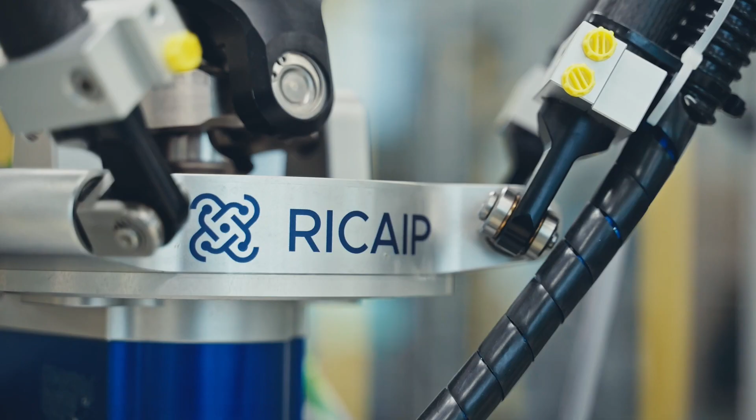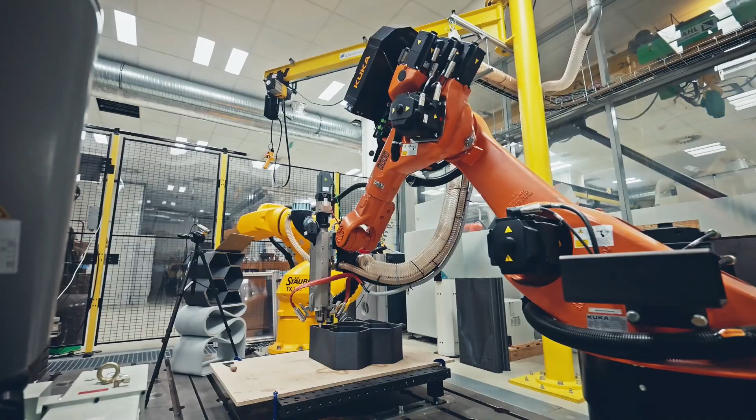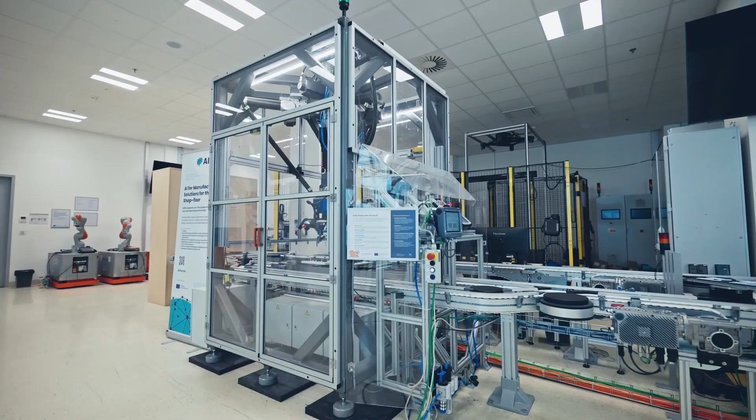Today's production must respond faster than ever to changing demands, shifting conditions, and unexpected disruptions. At RICAIP, we explore how manufacturing can truly adapt compared to traditional planning that still relies on a single, ideal scenario. In reality, however, capacities change and resources are not always available. Manufacturing as a service offers a different approach for more flexible and resilient production.

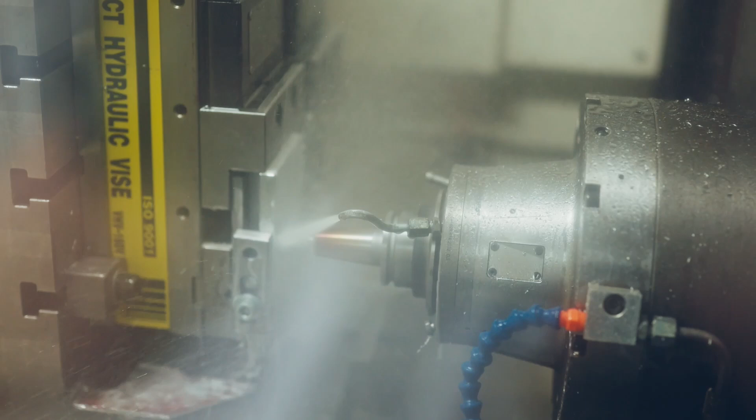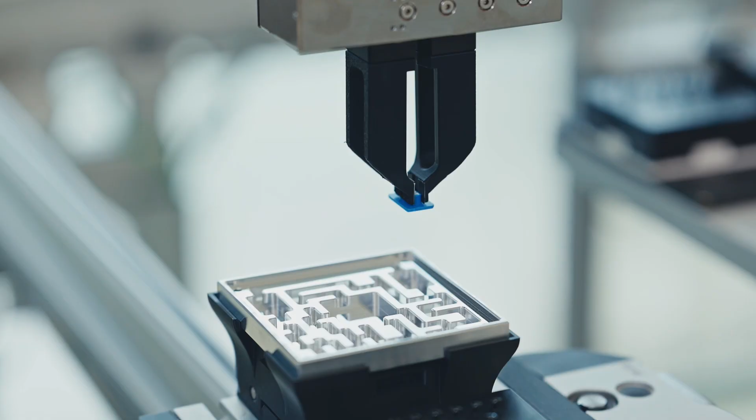The core of the production takes place in Prague. Advanced technologies such as 3D printing, machining, and automated assembly are used to manufacture and integrate key parts of the product. The execution of each operation is continuously coordinated by a central system. At the center of this process, there is a manufacturing execution system, or MES. It defines the workflow, assigns operations to available resources, and synchronizes all steps in real time.

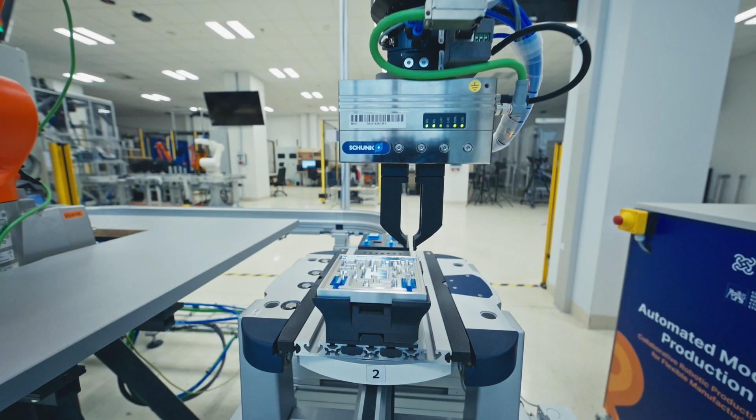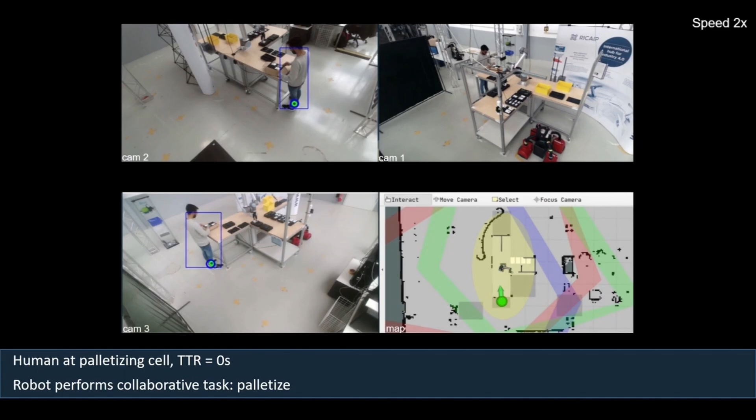By selecting a product variant, the entire production is configured and planned automatically using advanced methods such as graph neural networks. The test bed in Saarbrücken demonstrates a multi-agent system for production execution, showing that not only individual machines, but also complex systems can be integrated using standardized interfaces with defined semantics. The test bed in Brno is one of the production sites. It manufactures specific components and enables remote process inspection using an autonomous mobile robot.

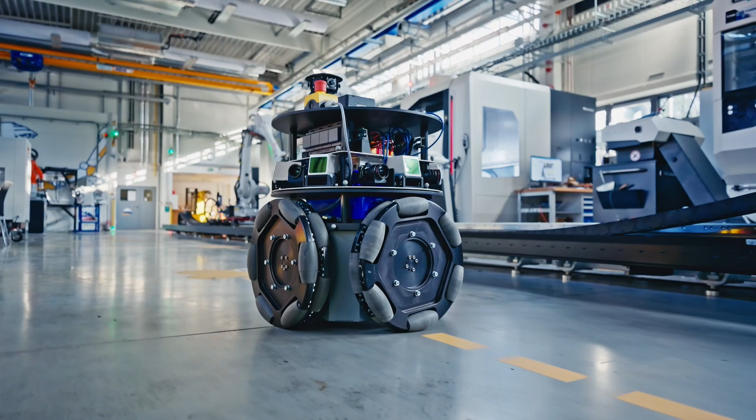All components are brought together, showing how manufacturing as a service operates as a unified system. This is enabled by standardized interfaces based on OPC UA and MQTT, real-time data exchange, and the integration of existing machines into one coordinated environment. Coordination is handled automatically using modern methods based on machine learning and AI.

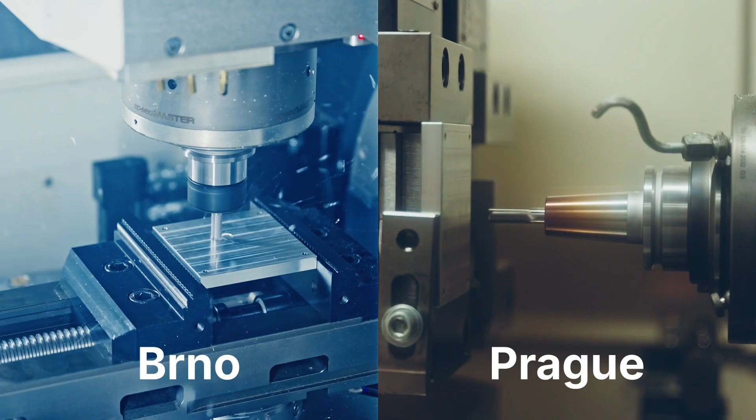What makes this system powerful is its flexibility. Operations are not fixed to specific machines or locations. They can be reassigned at any time based on capacity, availability, or changing requirements. If one resource becomes unavailable, the system can automatically find an alternative way to complete the task. For companies, this means greater flexibility and faster response to changing conditions across the entire value chain.

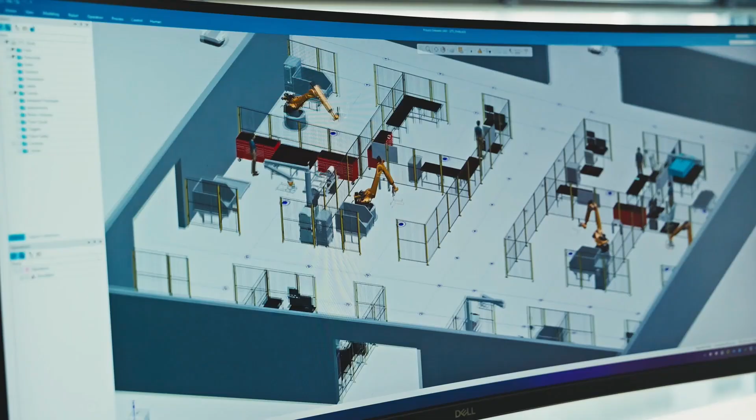The manufacturing as a service concept has been demonstrated with the T-Process platform and industrial MES deployed at many sites, making adoption in real environments straightforward. From coordinated operations to a finished product, RICAIP transforms manufacturing from fixed planning to an integrated, flexible production, ready to adapt to current challenges.

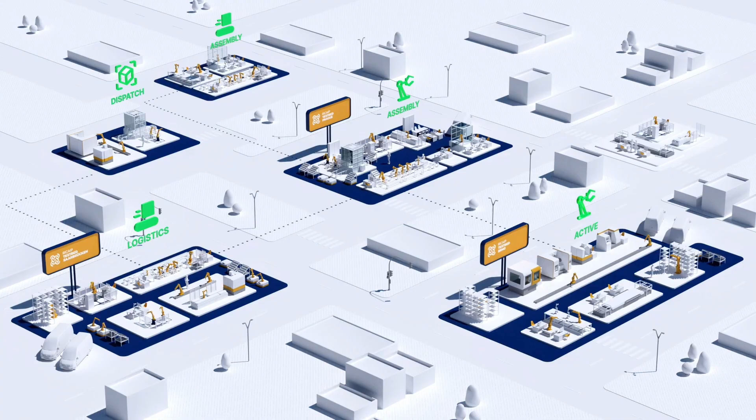So this was the introduction of the idea, and actually the idea that was at the beginning of RICAIP and that was, let's say, accompanying us for the whole duration of the project. Now I'm going to go a little bit more into the technical details that will show actually some pieces of equipment that are part of our testbeds, but also talk more about the concept of how machines are interconnected into bigger systems and then to individual sites.

The state-of-the-art production is mainly controlled intuitively, so there is no flexibility. Typically, there is no flexibility in how the production is organized and how the production is controlled. So when planning is performed by a manufacturing execution system or an ERP system, it's often based on infinite capacity assumptions, so that we do not expect any disruptions, any failed buffers, and so on. So no alternative work processes are available very often.

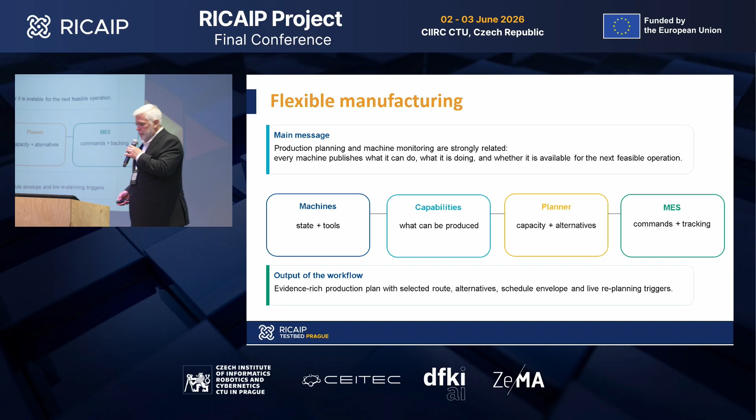So this is the idea and how we implemented it. These are the main blocks of the solution, which consist of machine data and representation of the resources or assets using asset administration shell, which is one of the key concepts of Industry 4.0 from its very beginning. And of course, we need a standardized interface to the machines to provide commands to them, but also to read the status and actual information about what is going on there.

Then we want to match and explain how this can fit together with the requirements of the products, what needs to be produced. So these are the capabilities, availabilities, matched to what is needed. Then dispatched to the manufacturing execution system to execute the commands, provide some operator view over the dashboard, and have the possibility to replan the production when conditions change.

I would like to emphasize a synergic project, RACEMAN, which focuses on manufacturing execution service, manufacturing as a service, and our participation is based to a very big extent on what RICAIP created.

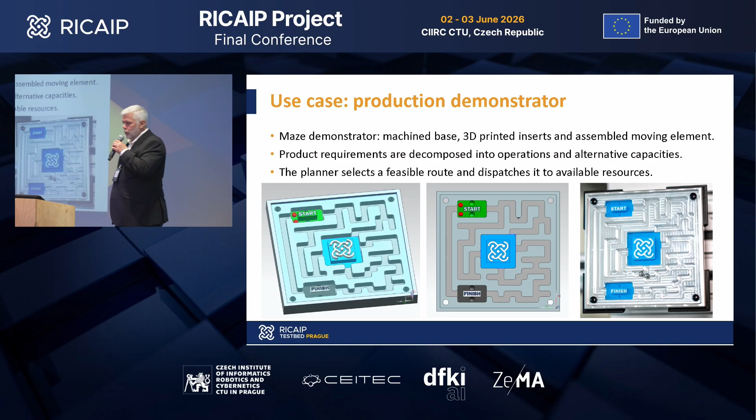So a simple maze, which consists of production operations as well as assembly operations, and these are the individual subparts with steps that need to be executed. In fact, this is the route for the product to be produced from individual subparts to the final product.

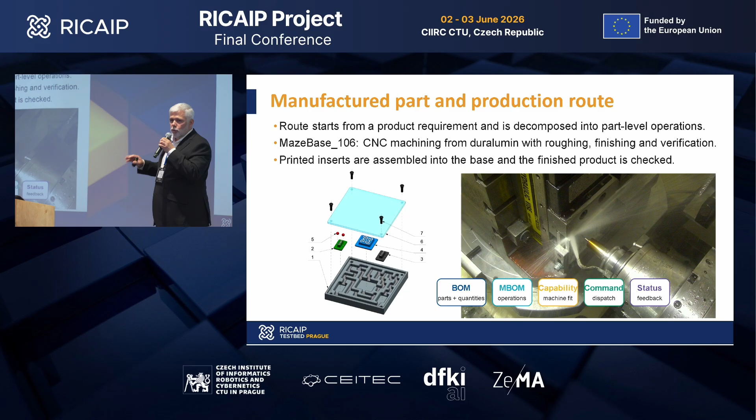So these are described as bill of material, then bill of operations or bill of services, capabilities that the machines provide, commands and status for the individual machine. So now we are at the level of single operations, which can be executed by specific machines at specific sites.

So just a short view into what machines are available and what machines participate in this specific production, in this specific demonstration product.

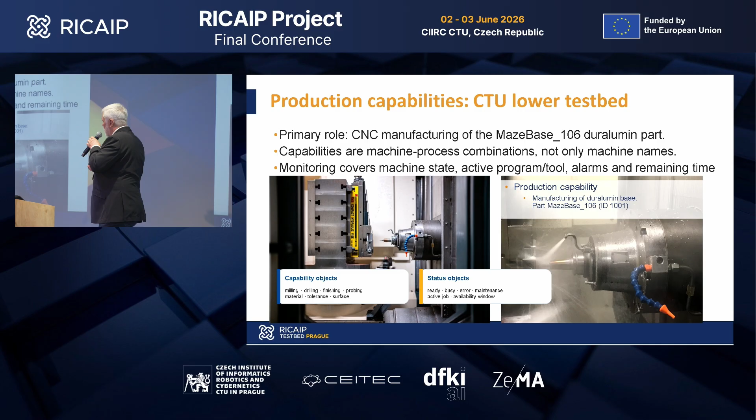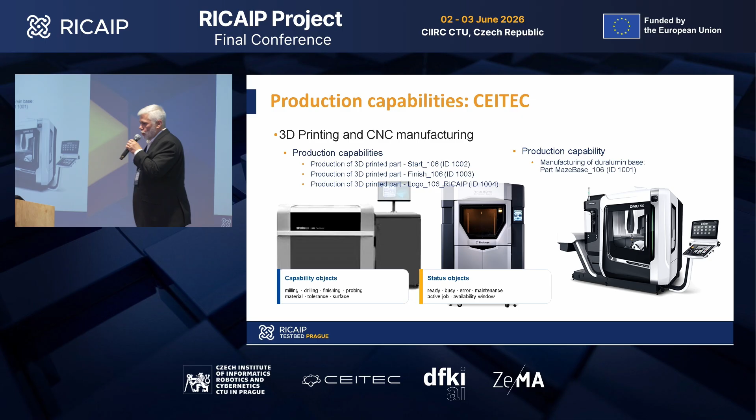Production capabilities in CEITEC include 3D printers and machining centers as well, so you can also see the capability objects, status objects, and for our specific case, these are the capabilities that are offered to the network of interconnected testbeds.

And the capabilities here in the upper testbed in Prague mainly consist of assembly, transport of the products, inspection, and final release of the part.

So these are the individual sites, three sites interconnected through standard interfaces, asset administration shells, and advertisement of the capabilities. In fact, a unified data model was created to standardize the communication.

I mentioned it several times that it's based on asset administration shell, which allows other sites to be included easily using the same standard interface. So it's about the assets, but also about real-time communication using real-time OPC UA, mainly the OPC UA standard.

Production planning is a crucial part of this. So we take the bill of service, we take the required operations, in fact the technological recipe, match it together to see which resources can be used to perform specific operations, create a plan based on the capacity and the capabilities that are available, and then dispatch the commands to the manufacturing execution system, or through it, to the machines.

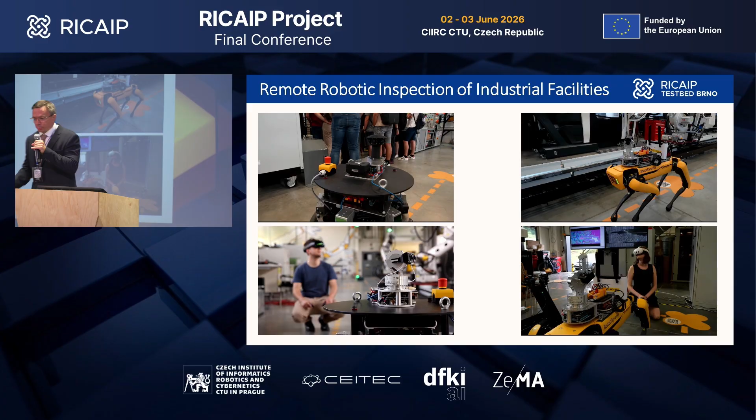The first one is our Odin robot, which was built for the RICAIP project, specifically for industrial facilities. It's a machine only able to work inside buildings on flat surfaces. It has so-called omnidirectional wheels, so it can move in any direction, and its payload capacity is about 300 kilograms.

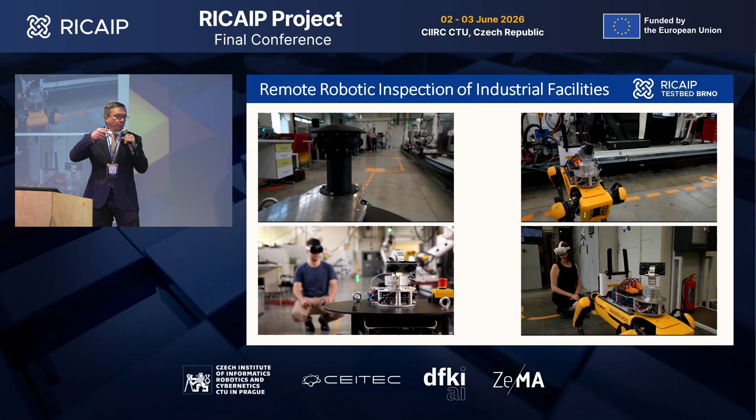The second one is a completely different machine—a walking quadruped from Boston Dynamics, which was not developed by our team, but we added our own equipment on board this robot.

So what we are going to talk about is kind of a strange combination of fully autonomous machines—with trajectory planning, obstacle avoidance, 3D scanning, and so on—together with the telepresence principle, where we have a system able to help with remote inspection of inaccessible or dangerous places, or simply features we want to see inside a building.

So firstly, just a few words about the autonomous mode on board the Odin. We've got all the stuff robotists like to use, such as six Livox Mid-70 3D lidars on board the robot that can sense a full 360-degree view around it.

We've got our own onboard computing machine based on Intel NUC running Ubuntu, and we've got algorithms based on local and global cost maps, A-star modification, and so on for local and global trajectory planning. Everything is based on ROS2.

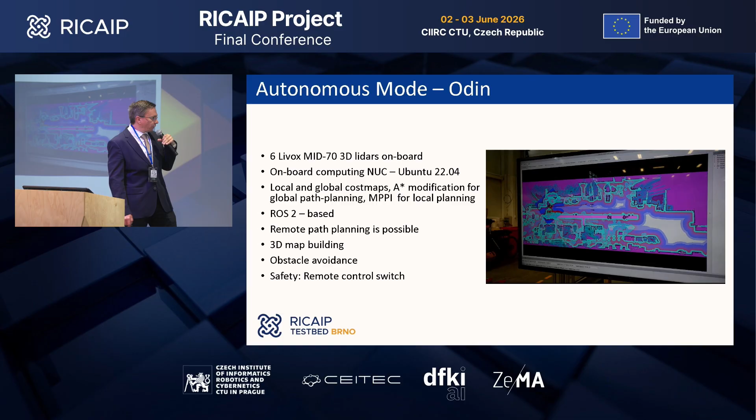And what's also important, since we are moving in industrial spaces, is that we think about safety. So there is a remote control switch which fulfills SIL standards, so it's really quite safe.

So what's the telepresence principle on board? Well, the principle itself is quite standard. What might be quite interesting, we've got something on board the robot, I will speak about it later, but what is interesting is the operator's part, where we've got two basic approaches that we can use.

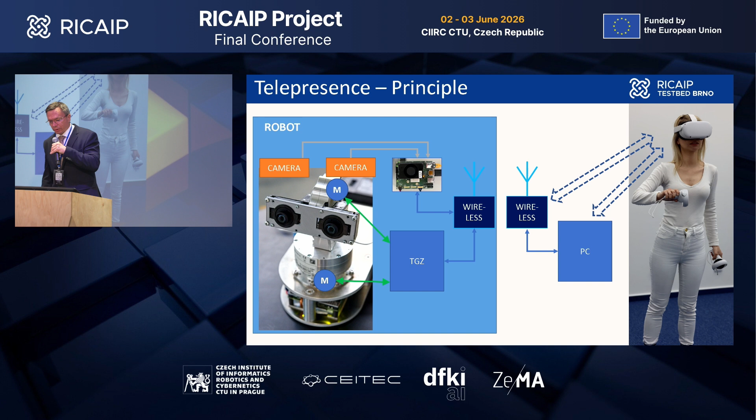The first one is that the data transferred through half of the planet, if necessary, can go directly to the head-mounted display. The head-mounted display itself has its own calculation capacity, an Android processor on board, but it's not that powerful. So the other option is that we can go through PC and make everything more safe, faster, with lower latency and higher resolution. So we've got both of these options available.

Since we are really heading towards high resolution and high-end telepresence, we have decided to build our own electronics on board the robot to grab the data and get everything really fast with low latency. So we have built a combination of NVIDIA Jetson, with its really high computational capacity, with FPGA that is made to get the data as fast as possible from the cameras. We are able to get data from up to 6 cameras, each of them can be different.

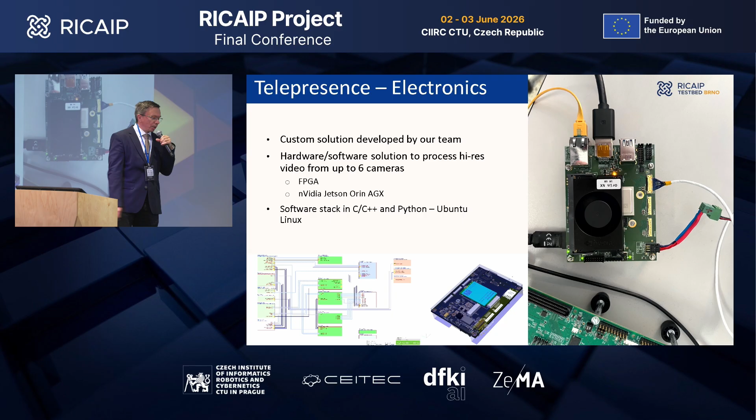We were also forced to build our own software stack, which is based mostly on C and C++, and some parts are also made in Python.

Then we've got the real physical hardware. We've got two approaches that are interchangeable, which is very important. The first one is the articulated camera head, with 2 degrees of freedom, so we have built our own manipulator together with a motor company, TG Drives in Brno, which is really ultra high speed, very precise with low latency, so it's basically able to copy the movements of a human's head. And what's very important on this one is that it is possible to have stereo vision, so we've got 2 cameras, and you have a really highly immersive stereo vision system.

What's also important is it's completely independent, or it may be completely independent, on the robotic platform, so it's really fully detachable. It has its own battery power, but also its own communication, and it doesn't matter whether we are using 5G, Wi-Fi, MANET, or whatever. So it may be really completely independent from the robot.

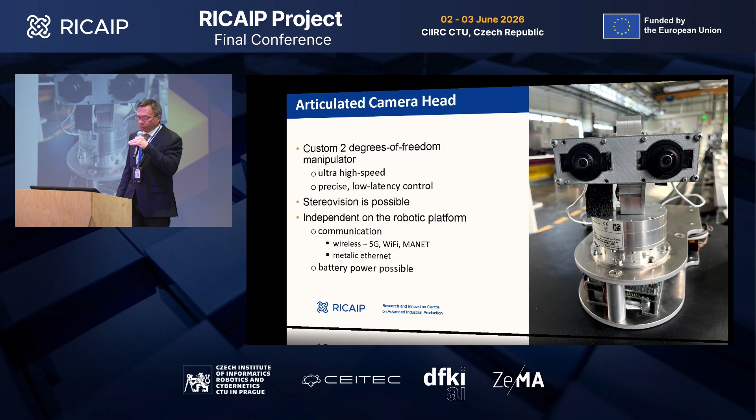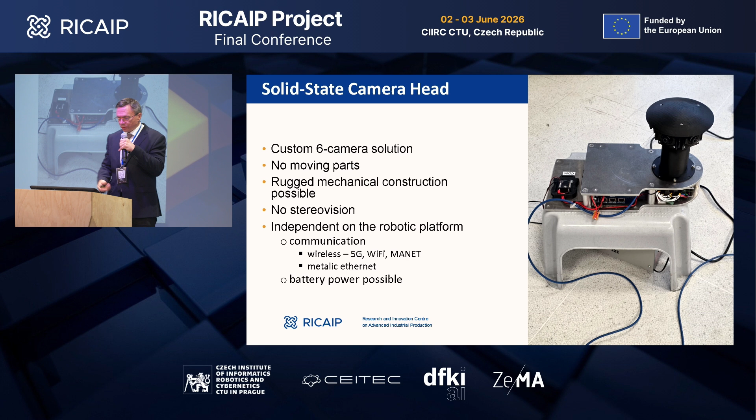But the biggest drawback or disadvantage of this approach is that it's not possible to have stereo vision with such a subsystem. Again, this one is also fully independent of the robotic system. We can put a battery, we can either connect it wirelessly or through wire to the robot. And what's again very important, they are interchangeable, the dimensions are completely the same.

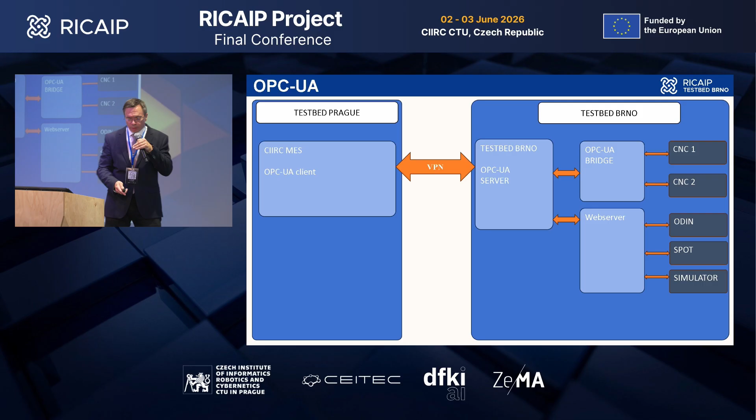Here we've got the server, but because we've got two kinds of machines, the first ones natively speak OPC UA language and are connected through an OPC UA bridge to the rest of the world. Then we've got robots or simulators that don't speak this language, so we've got a web server that makes translation between these languages.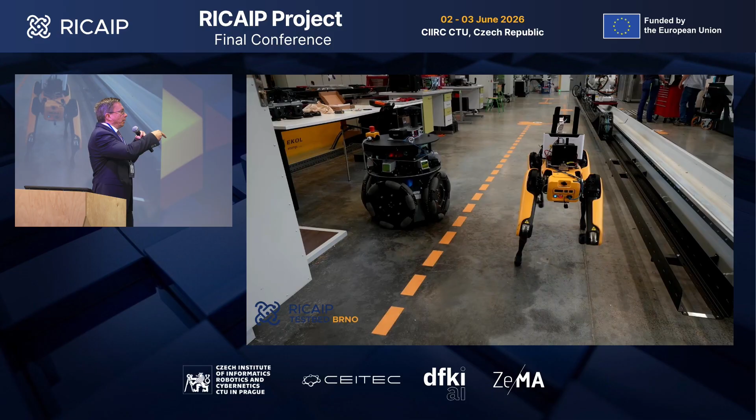So this is the complete description of the mission. We've got an operator who might be in Prague, for example, using this OPC UA screen or interface. He or she switches a pre-programmed mission, and this mission is fully autonomous. As you can see, we've got a real-time view of what's happening in the brains of the robots.

But what's very important, the operator has the option to take the head-mounted display and observe what's happening in the facility.

Obviously, there is still the option to break the mission and drive the whole system completely manually. That still is in there. And as you can see, the robots have the 3D view of the surroundings, so obstacle avoidance and this stuff is still in here.

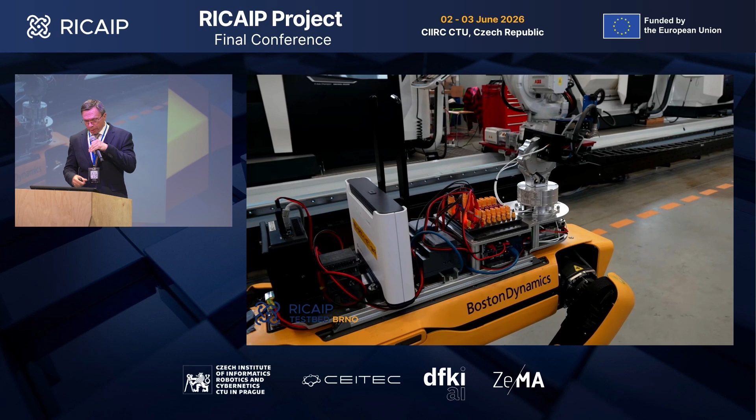What's also very important, the operator can just press one switch to go from one robot to the other. As you can see, each of them has different viewing capabilities - one has this articulated head, the second one solid state. Still, the view or the immersion is more or less the same.

Yeah, and that's all. Thank you very much for your attention.

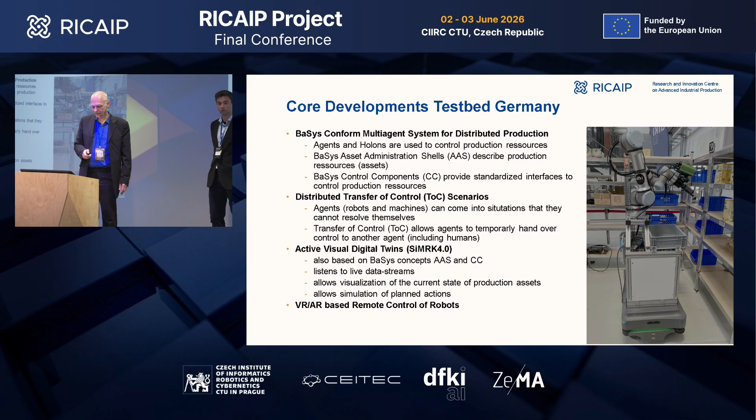So quickly an overview. We had several core developments in the German testbed: the BaSys-conform multi-agent system for distributed production. Pavel just talked briefly about it. Alexis will give some insight later on.

But we were also working from the beginning on distributed transfer of control scenarios. So transfer of control, quickly, as Luděk already said - you can have autonomous robots. Autonomous robots can come into situations that they cannot resolve by themselves, and then they need help of another agent. That agent can also be human. We showed this already when the German president was here. We showed one demonstration, later showing how we could teleoperate a robotic arm from here in Saarbrücken.

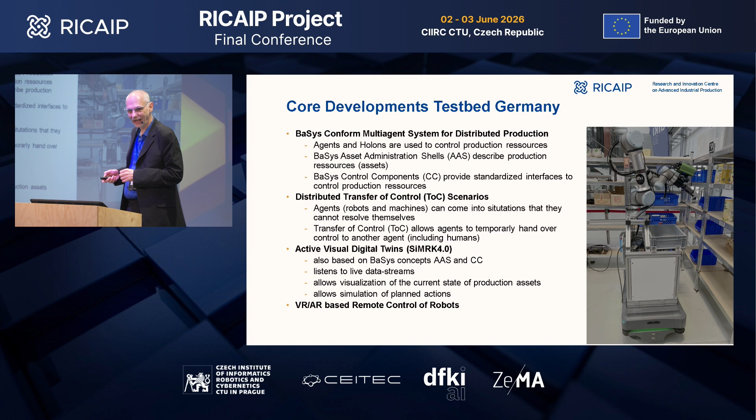And we're doing all of this using active visual digital twins, where we use the information coming from asset administration shells and show it in a very visual, three-dimensional way, which is also very good for transfer of control, as we will see live in a few minutes. I want to speed up a bit because we really want to show that live demonstration.

So with that, I would hand over to Alexis, who will talk about the multi-agent system.

Yes, thank you. So let's present a little bit what we do in Kaiserslautern at Smart Factory Kaiserslautern and at DFKI. We have our own demonstrator system demonstrating different use cases, and we are part of RICAIP 2. We typically have so-called modular demonstrators - we like to call them production islands. On those production islands, we have different modules, for example a quality module or conveyor module. You can see Smart Factory Kaiserslautern at different booths and fairs, for example at SPS in autumn or next spring at Hannover Fair - we're there each year.

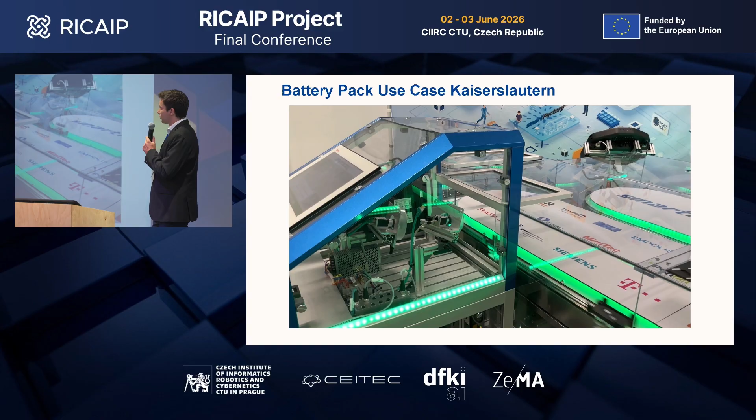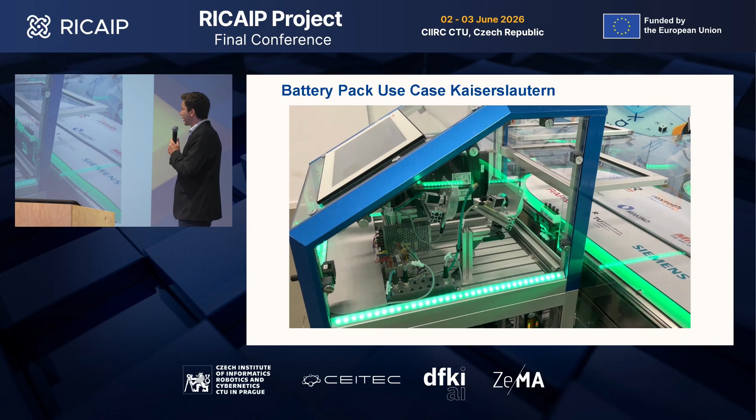Okay, here I just brought the battery pack use case we presented in Kaiserslautern directly for RICAIP. For example, here we have a quality control module taking images, and with the help of AI, it can look at different faults or faulty batteries and detect them. And then this can be transported to different modules.

So we have this really modular approach with capabilities. As Pavel explained from the Czech side, we have the same thing, and we also do planning and execution system, and we connect that to our production modules below that. So let's come to that middle area more specifically, namely our multi-agent system. The idea is that we combine our modules based on the technology together with this network of RICAIP.

So on the left side here, you could see this connector agent makes the connection to the RICAIP network. And then based on this connection, the goal in RICAIP was that we bring our technology to the RICAIP network, to actually show our multi-agent system directly at Saarbrücken.

So we did not only have this at Kaiserslautern at our own demonstrator where everything works, but we also implemented that directly in the RICAIP network and added our concepts, for example a modular product, showing at the Raspberry Pi scenario, and then connecting this to, for example, the digital twin developed in Saarbrücken with the asset administration shell.

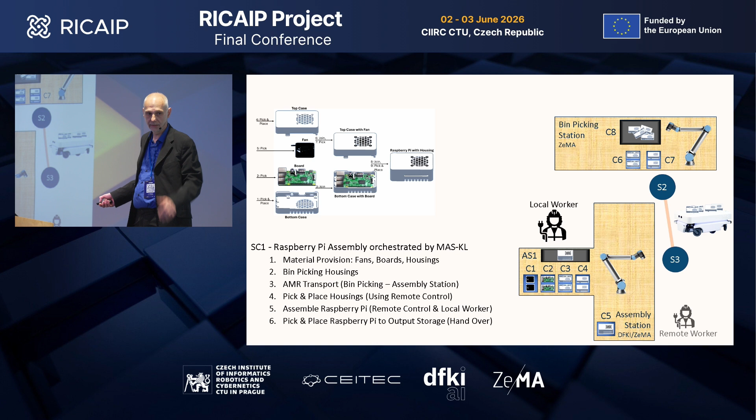And we also had the possibility that a remote worker from Prague, for example, or from Brno, could virtually go to Saarbrücken and work together with somebody else.

And now we had the chance to transfer this knowledge, all that stuff that we learned in RICAIP, closer to the industry in a project called C4Retail. That's an international project between Korea and Germany. We heard about Korea in Tillmann's cooperation talk.

MetraLabs is a German company that builds robots, especially scanning robots. You can see them here in the Czech Republic, maybe in Decathlon stores, but probably they drive around at night, not during the day. And Kim is building a mobile manipulator, and we as DFKI put it all together.

So the idea is that we have a robot driving through the warehouse. Doesn't have to be retail, can also be an intra-logistics scenario through a warehouse, and it takes inventory of all the shelves and fills up the digital twin with all the information that it sees. And then we can automatically detect if there's something wrong, if there are anomalies, for example misplaced products or materials, or that a shelf needs refilling.

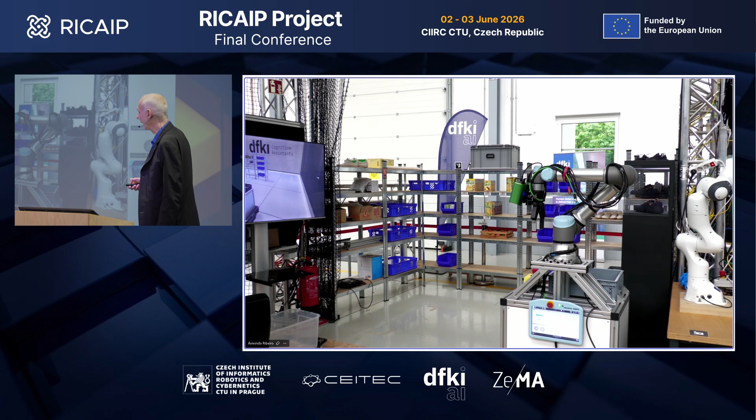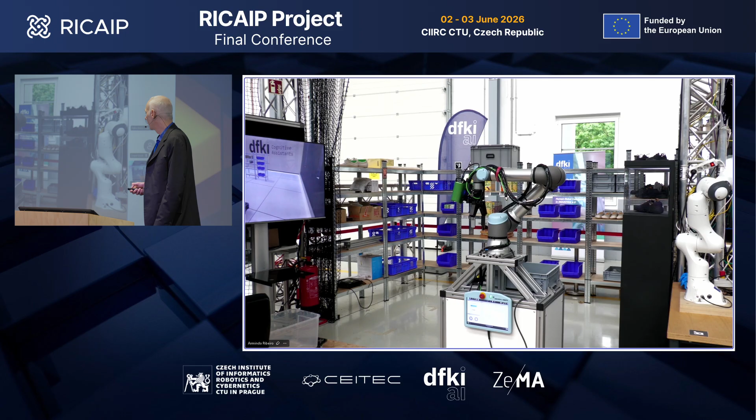When Andy starts the process, we slowed it down so I can explain a little more what's going on. As soon as Andy starts the process, we will see the robot right over there. So Amindo, if you could show the digital twin.

This is the digital twin. It gets live information from the robot. Here you can see the planned trajectory. And now the robot has reached the shelf.

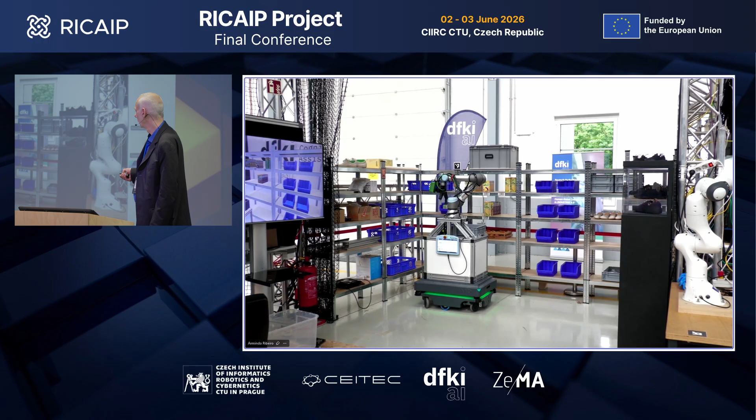If we can switch back to the live view again. So the robot is now in front of the shelf, and the next step will be to check this middle layer of the shelf. We will see the robot going into a position where it can now start our visual pipeline.

This is a rule-based AI system doing this. So it's not an LLM hallucinating about what could go wrong. This is very reliable.

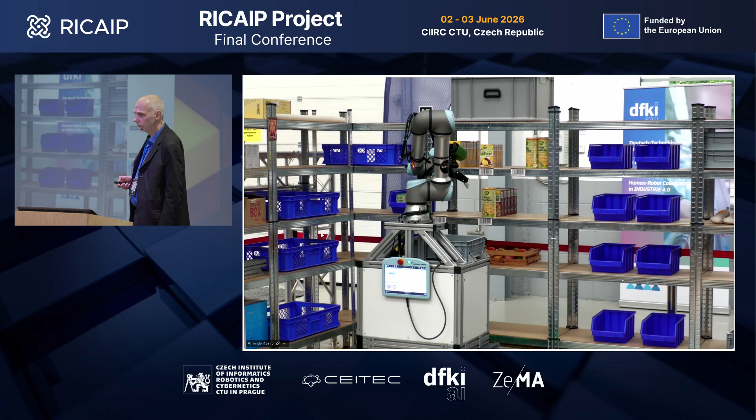So the next step is, if we switch back—thank you—the robot is now trying to resolve the problem by taking away these corn waffles.

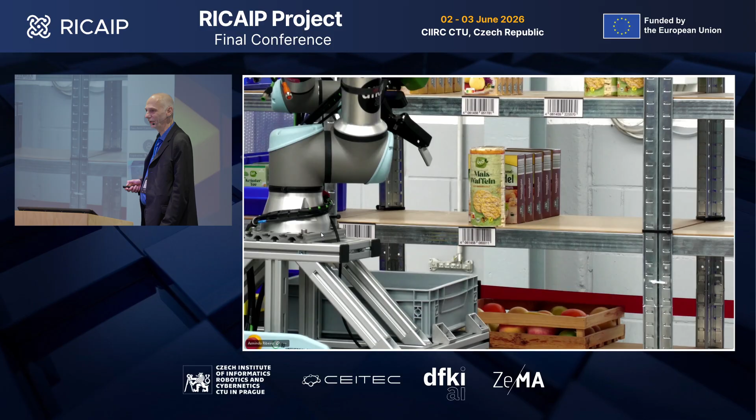And now this is the interesting part. Two things can happen: it can go wrong or it can work. Actually, I'm hoping it goes wrong so I can show you the transfer of control, but we have a backup. Oh, it works.

For this, the 2D image we saw earlier isn't enough. It had to take a 3D image to find the correct position of the item in the shelf, and then decide if it could really grasp that object. This is very tricky, and sometimes it can really go wrong.

So our plan B to show you the transfer of control—Andy placed it back, and I can now show you what it looks like if I take over control. For this, I need these glasses here.

Which also means I cannot see you. And I need to start the application. So you should see what I'm seeing, I think, on this screen. This is going to be tricky because my hands are shaking.

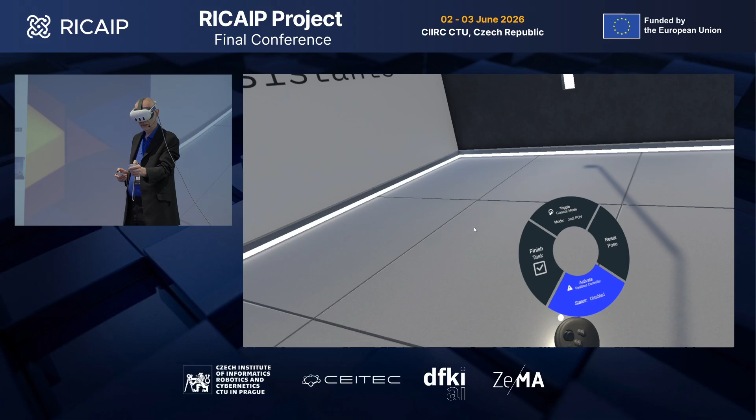So here we are, basically in Saarbrücken. Can you see that? Yes. Okay, I can now take over control with this menu here—activate—and I'm seeing a green light on the robot.

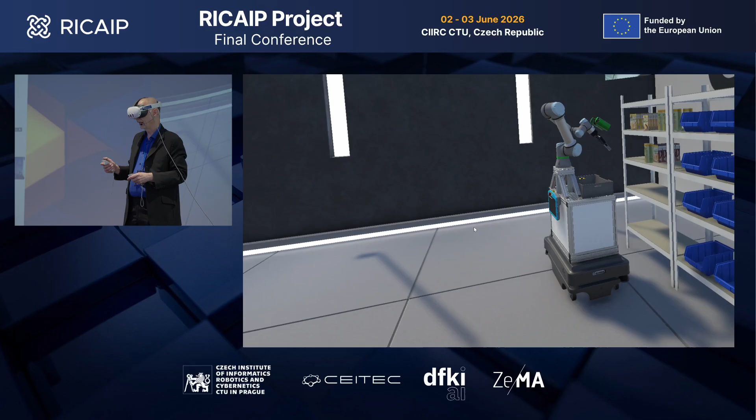Which means I can now move the robot, and I'm now looking onto the 3D representation of the robot. We have a special mode to control this, where the end effector does what I'm doing with this controller.

On top of that, you can see this live camera stream, which shows me the perspective from the robot itself. So what I'm doing now is trying to find a good position for the robotic arm.

I'm opening the gripper. Hey, oh, wrong button. And now I'm switching over to a different control mode that makes it easier for me to look at the live video stream and control the robot arm there.

And I'm going to close a little bit more, and hopefully without crashing, taking it out. Yep, and I'm switching to the other mode again. And I'm going to place it...

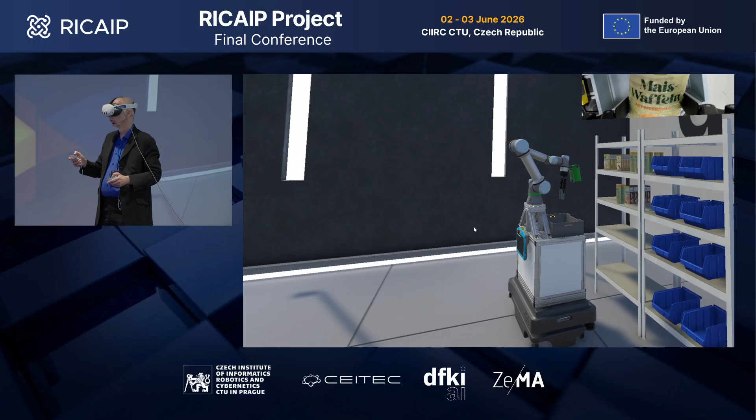Inside here. Come on, open the gripper. Now. Okay. And, oops, I'm finishing the task.

And yeah, so that was the live demonstration. Of course, the idea is then for the system to learn from this grasping action I just did, so next time it hopefully can grasp the product by itself.

It will also be a multi-robot system, so we have one robot that can scan all the shelves, and the other robot will do all of the handling tasks. So that's it from our side. Thank you very much.